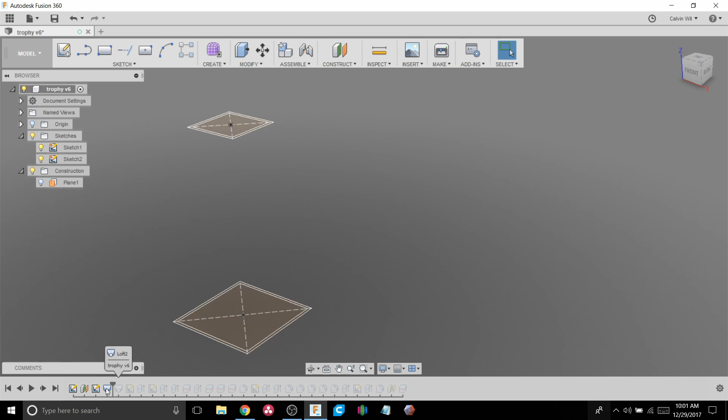Now to create the shape between them, I used the loft command and initially got a solid item, but that's not what I wanted. So I then came along and lofted out the two inside pieces, and hey presto, I got the shape that you see here, which is what I wanted.

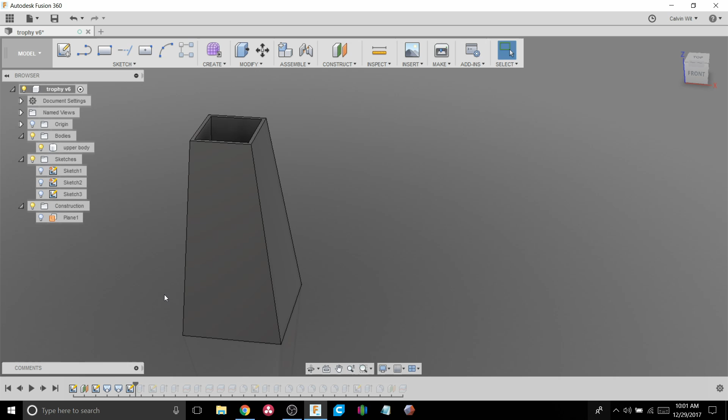Then what I did was draw a triangular shape along the side here, and this is what gave me the slanted front. Then I did an extrude command, and a handy feature, because this is along the middle, was I told it to do a symmetric one, and then I just visually dragged it out bigger than the part so I knew it would cut out everything in there.

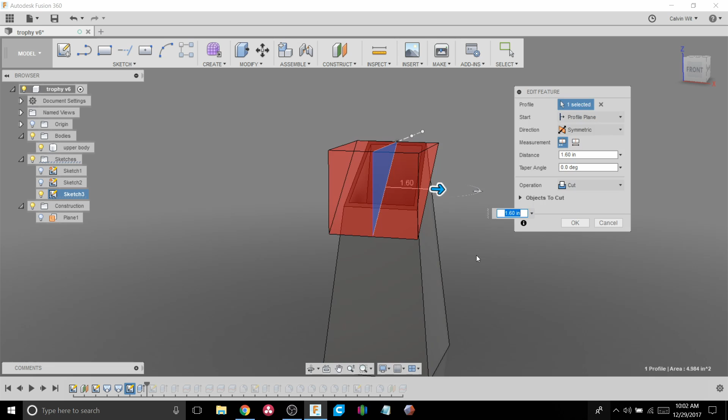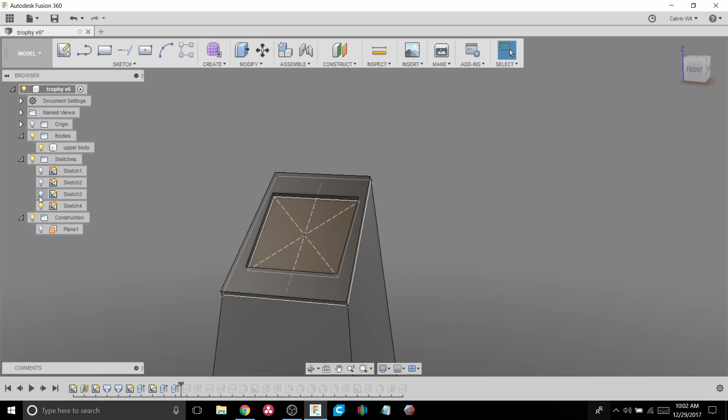When that was done, I then drew a simple rectangular shape in the shape of the top of the part, and then drew the square in the middle that holds the inlay. A couple of extrudes later, and we have this wonderful shape here, although you will notice that there is some excess hanging over the edges.

So to remove that, I did a couple of split body commands and ended up with the clean shape that you see here. Now I understand that might not be the most efficient or proper way to do it, but that's what I did. It worked for me, so I'm sticking to it.

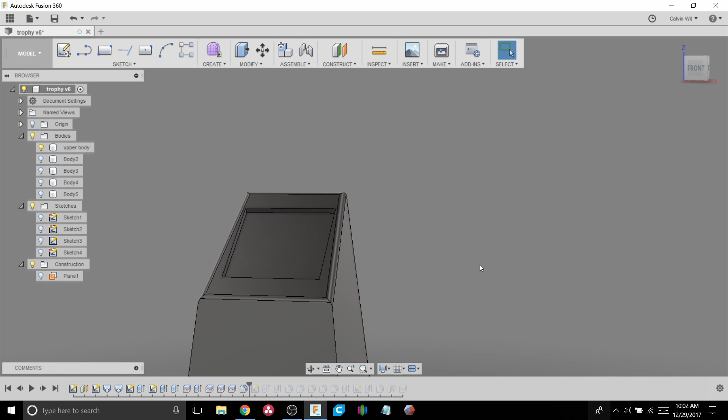I decided it was looking a little blocky, so I put a nice little fillet on the edge and then jumped to the base. Now the base was really simple, as all it was is just another square with an offset to create a wall thickness. That then got extruded into that shape.

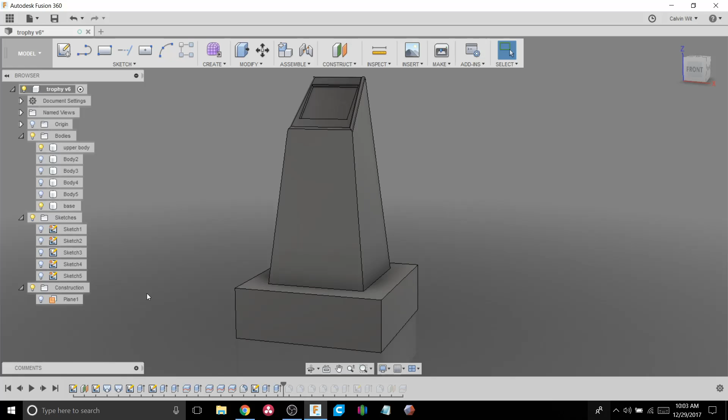And then I decided that it needed a little bit more filleting, so I just ran around and threw some fillets on everything and ended up with this. Now at this point the part is ready to go, although some people might be wondering why I don't have a square in the bottom to help with printing.

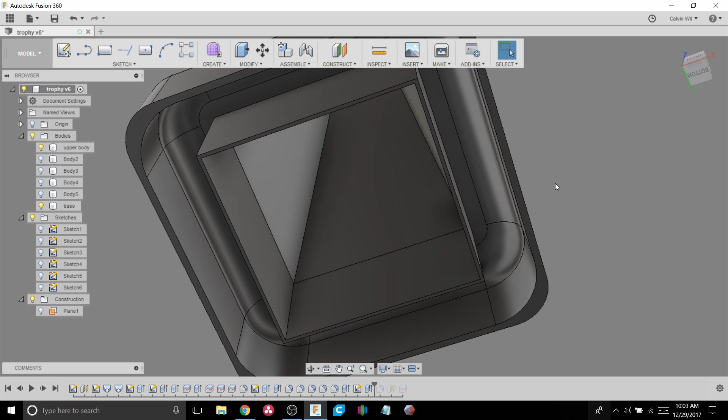Now the only reason why I didn't is because I found that running the settings that I was running, it was actually going to take longer and use more material to use this versus using support material, but it varies. It's totally up to you if you want to add it or not.

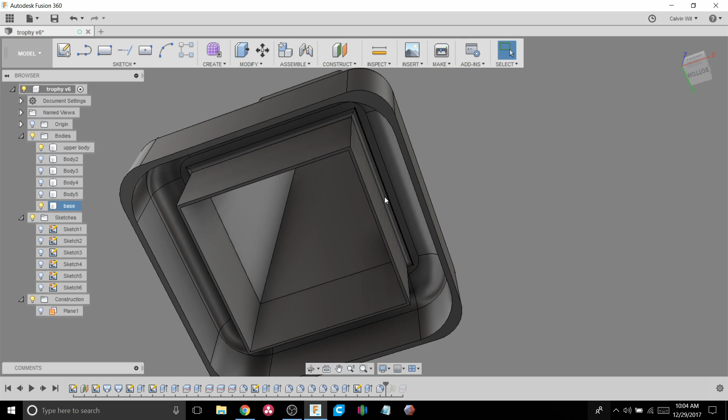An advantage is you are given an opening in here that you could fill with something weighty if you wanted to make the bottom of the trophy heavier, but keep the inside free if you wanted to put a light in there or just save material. If I was to do that, I also put in a little bit of a fillet along the edge to reinforce things, so that's totally up to you.

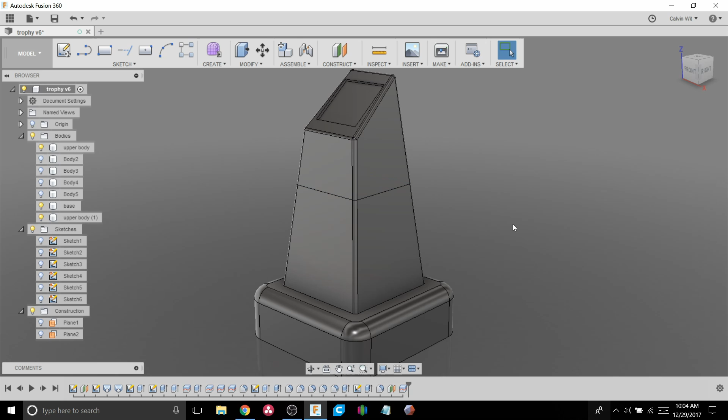Now I understand some people's printers might not be able to print this top piece in one go, so a pretty simple method of getting around that is to create a construction plane at about the midpoint, do a split body command, and you're pretty much good to go from there. If you really wanted to, you could probably draw in a rectangular shape on all four corners so you can more easily line everything up.

That's up to you. I've just designed this to be in two pieces as that's what fit my printer, but the Fusion 360 file will be available for those who do need to cut the model up into pieces or want to modify the file to make it work for them.